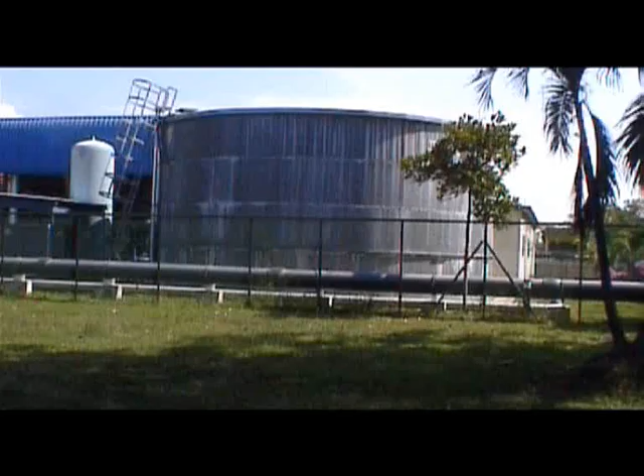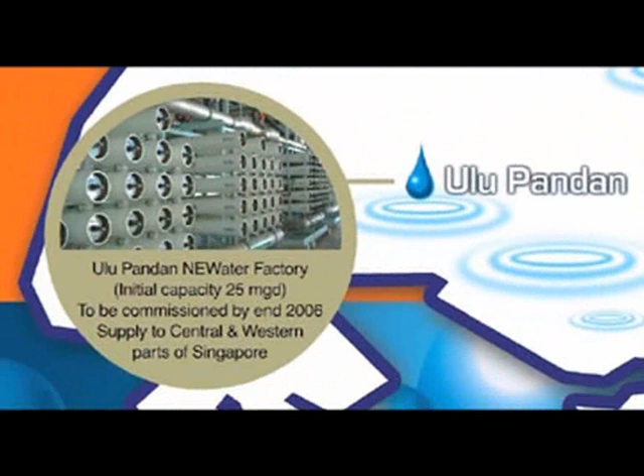In May 2000, the first NEWater demonstration plant for recovering high-quality water from secondary treated sewage effluent was commissioned with a production rate of 10,000 cubic meters per day. Since then, 4 plants producing more than 220,000 cubic meters per day of NEWater have been commissioned. This supplies 15% of Singapore's total daily water requirement.

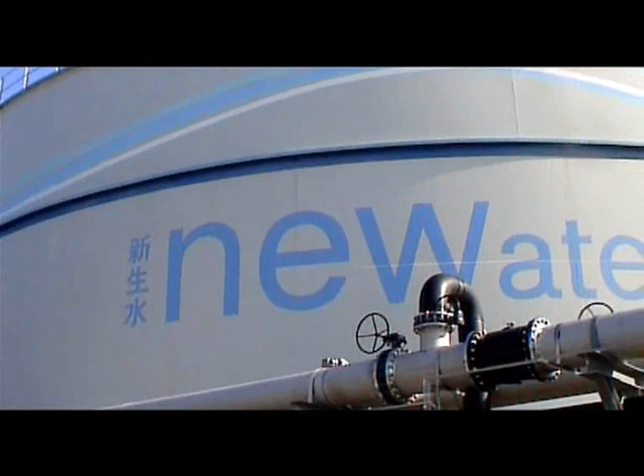PUB is the world leader in the application of reclaimed water. In 2002, PUB was presented with an Award of Excellence from the National Water Research Institute in the United States of America for its NEWater demonstration plant. Other international awards recognizing PUB's success were the Global Water Award and the International Water Association Award, presented in 2006.

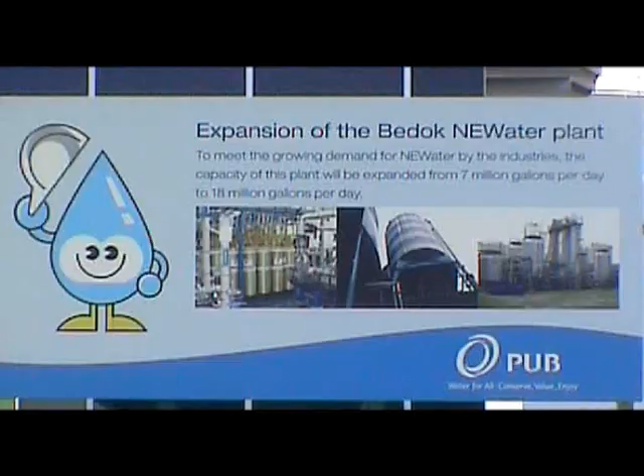Most recently, PUB was awarded the 2007 Stockholm Industry Water Award, widely regarded as one of the highest accolades in the water sector worldwide. PUB is a global leader in large-scale water reuse. Its latest state-of-the-art NEWater plant is the Bedok NEWater expansion, with a capacity of 55,000 cubic meters a day. Bedok NEWater Factory was the first water reuse facility in the world to incorporate a world-class visitor center.

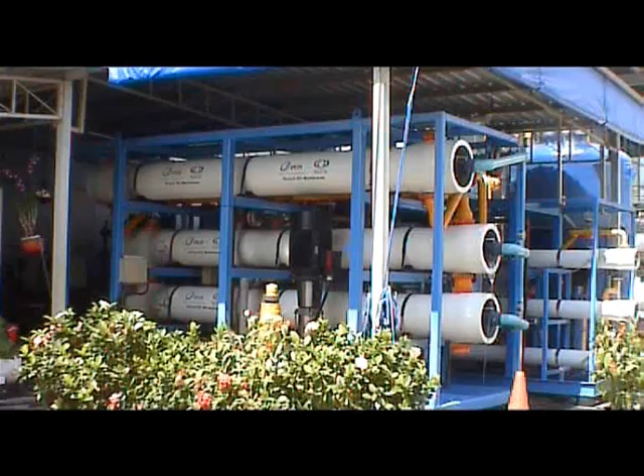After 2 years of successful test bedding at Bedok NEWater Factory, PUB is now the first in the world to use Grahamtek's 16-inch reverse osmosis membrane technology for wastewater reclamation. Grahamtek is PUB's technology of choice for its Bedok NEWater Phase 2 expansion.

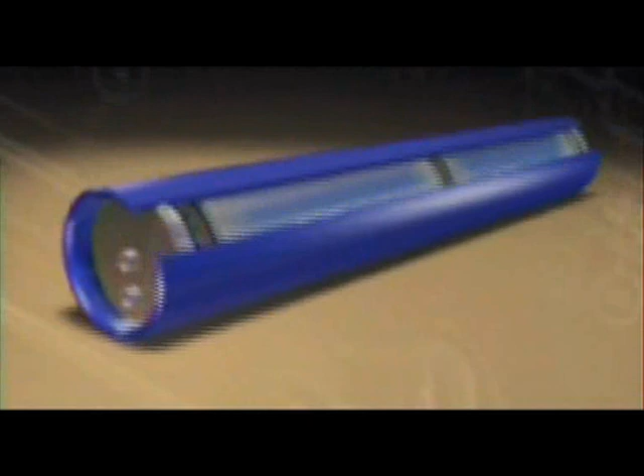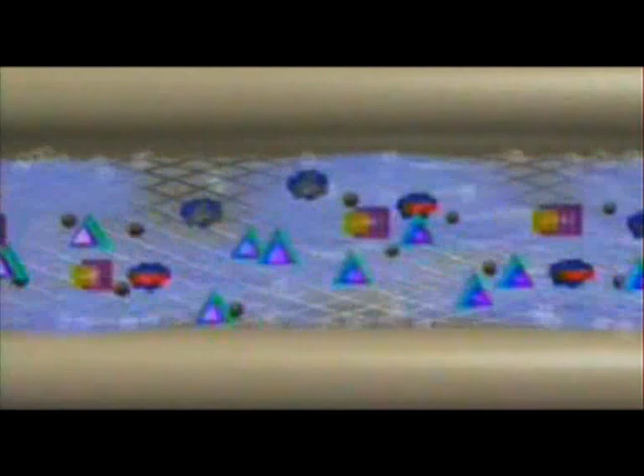Grahamtek's RO technology consists of its patented flow distributor on its elements and vortex generating devices in its vessels. These increase cross-flows, reduce boundary layers, and lower concentration polarization. The improved flow hydraulics through each membrane enables the Grahamtek RO system to operate at significantly higher fluxes with relatively low fouling over an extended period of time.

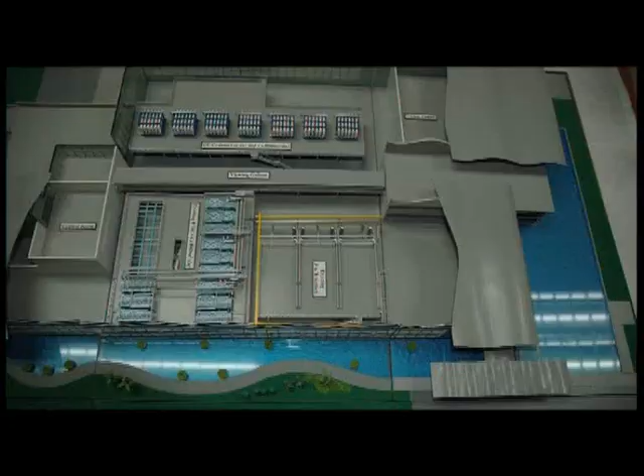At the Bedok NEWater Factory Phase 2 expansion, the operating flux of 24 GFD translates into 54% savings in footprint. The significantly less membrane areas and fewer pressure vessels required for the plant result in 75% less pipes and fittings.

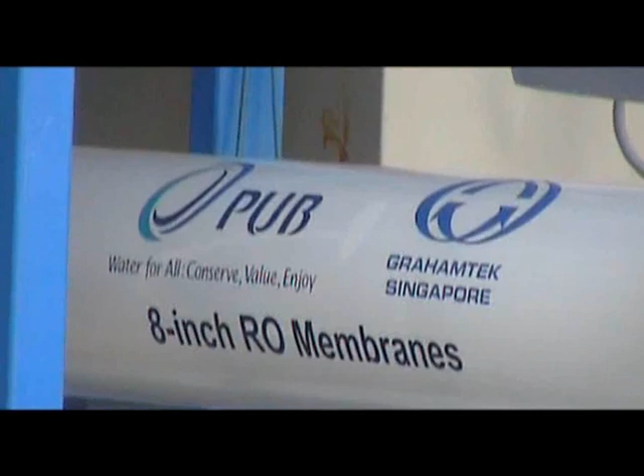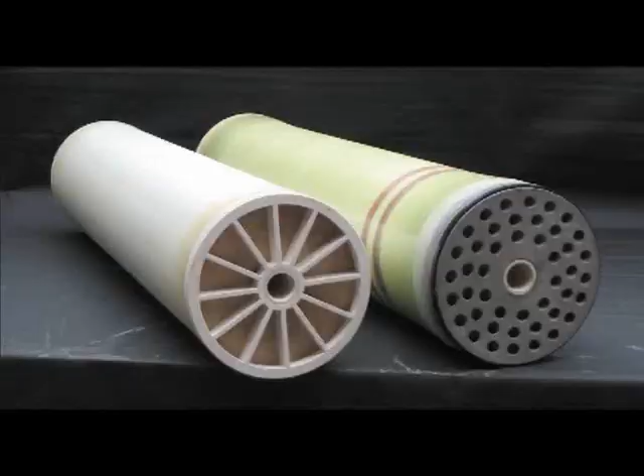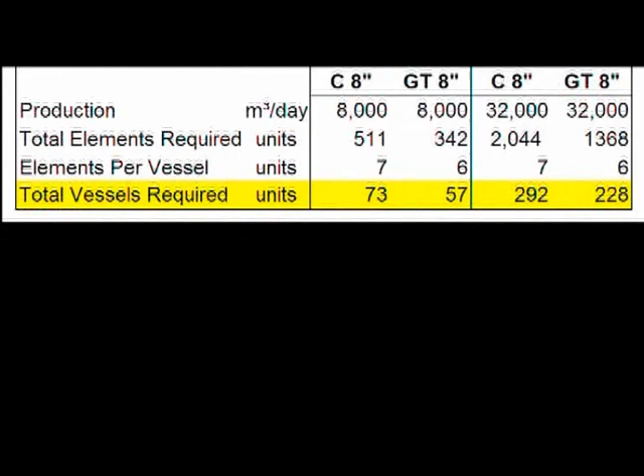Now, Grahamtek has successfully test-bedded at PUB Bedok NEWater its 8-inch RO elements with flow distributor. The Grahamtek 8-inch RO membrane elements installed with its patented flow distributor can now be used for the 8-inch membrane retrofitting market. At the proven operating flux of 16 GFD, with Grahamtek's elements for wastewater reclamation, you need 33% less elements for replacement. With high fluxes, less membranes and pressure vessels, smaller footprint and savings in pipe and fittings, all these translate into CAPEX and OPEX cost savings.

The Global Water Intelligence describes Grahamtek technology as the most significant technical advance of the year in desalination and has given Grahamtek a distinction award for the year 2008. Grahamtek, the technology of choice for Power Seraya seawater desalination plant, and now the technology of choice for PUB Bedok wastewater reclamation plant.

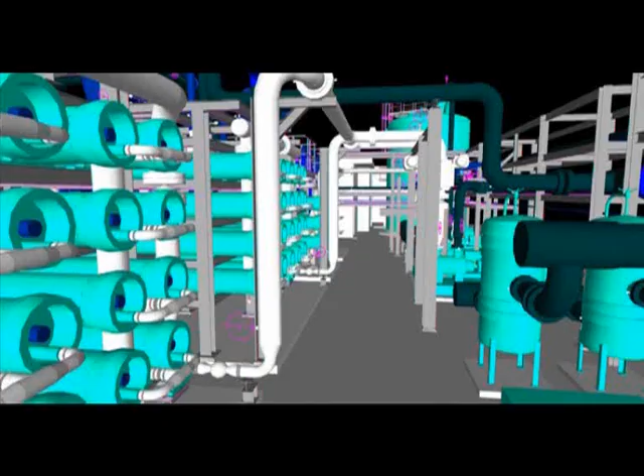Grahamtek's 16-inch reverse osmosis technology for seawater desalination and wastewater reclamation. Now in Singapore's Power Seraya seawater desalination plant, producing 10,000 cubic meters of water per day, with Grahamtek's RO system occupying only 250 square meters of space.

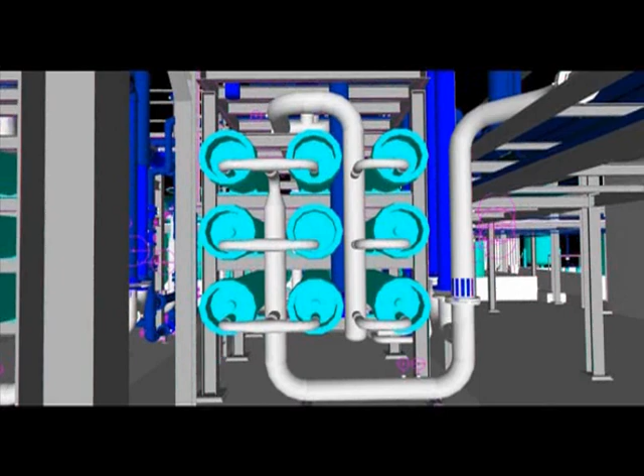From 2-stage sand filters to Grahamtek's 2-pass reverse osmosis system, where each pass consists of 2 trains. Each RO Pass 1 train has 24 vessels with 84 membrane elements. Each RO Pass 2 train has 9 vessels with 32 elements.

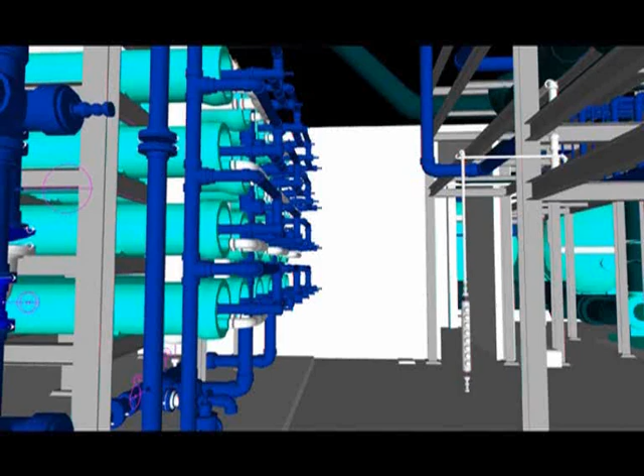The first pass RO system starts from the high-pressure pump, which delivers seawater at 535 m3 per hour at 35 bars, to a turbocharger, which increases the pressure to 51 bars, and feeds the seawater to the Pass 1 pressure vessels, which contain the Grahamtek membrane elements. The membrane elements which operate at high fluxes produce permeate, and the brine which is rejected is collected and passed through the turbocharger for energy recovery.

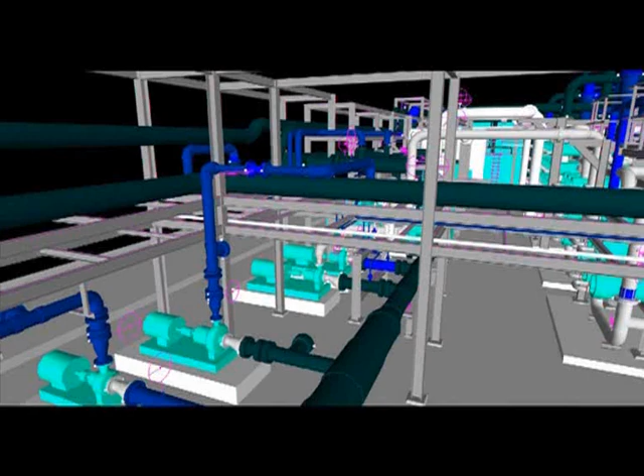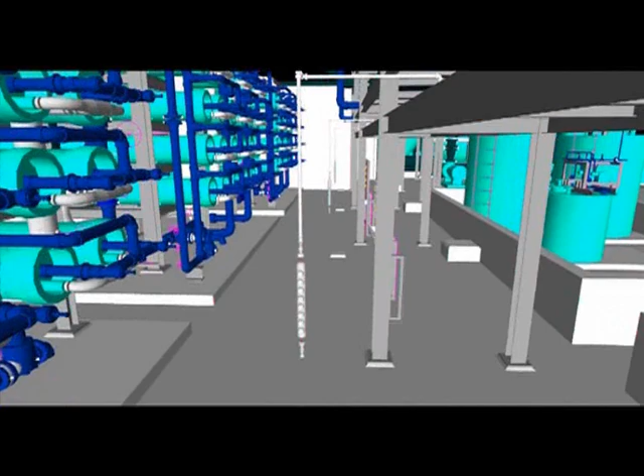The second pass RO system starts from the low-pressure pumps, which take water from the permeate tank and deliver water at 185 m3 per hour at 10 bars to the Pass 2 pressure vessels. They contain the Grahamtek membrane elements. The membrane elements operate at high fluxes to produce good quality permeate, and the brine is recirculated back to the filtered water tank and mixed with the incoming filtered seawater for RO Pass 1. Together, they produce 10,000 m3 of water per day.

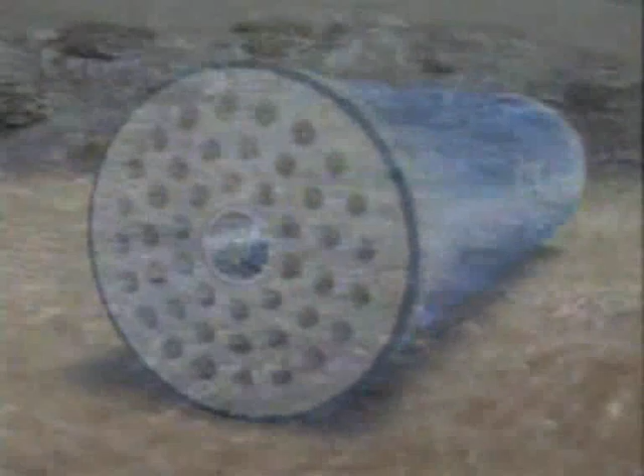Grahamtek's innovative 16-inch large-diameter reverse osmosis membrane element, all fitted with our unique patented flow distributor. The flow distributors and electromagnetic device improve flow hydraulics through the membrane by increasing cross flows, reducing boundary layer thickness, and lowering concentration polarization.

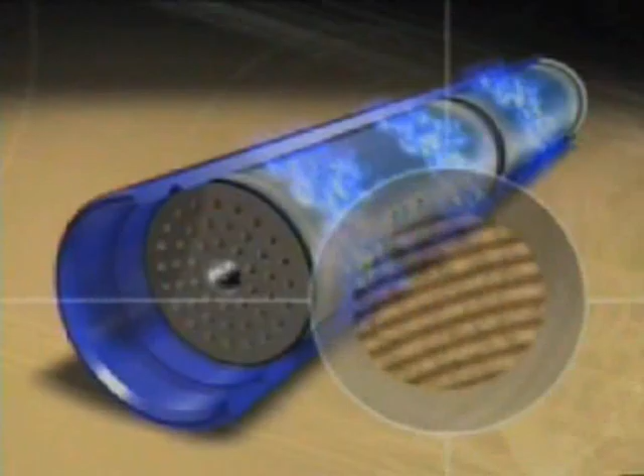The RO system can therefore operate at a significantly higher flux over a sustainable period with relatively lower fouling. Operating at a higher flux means that you require a smaller area, fewer membrane elements and vessels, less piping and fittings. Grahamtek reverse osmosis system saves your repairs, maintenance, and replacement costs.